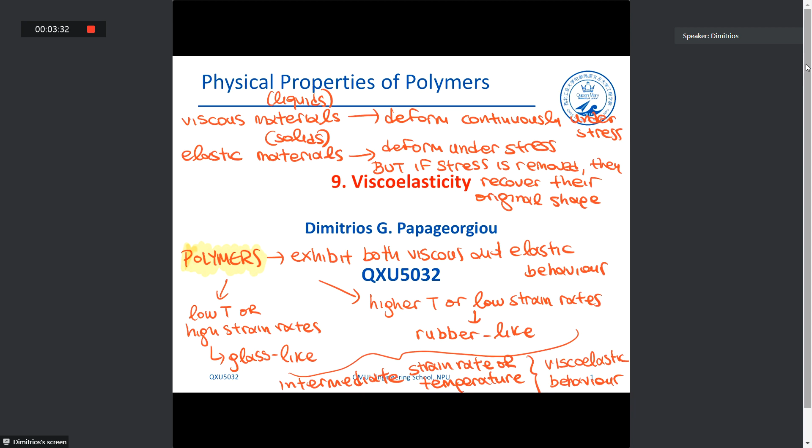Okay, so let's get started today. In order to finish with viscoelasticity, let's remind ourselves what we said about viscoelasticity, which is a property of the polymers, essentially, because they exhibit both elastic and viscous behavior, okay?

And we said that in terms of viscoelasticity, two phenomena that are very interesting and very practical in using polymers in engineering applications are creep and stress relaxation, okay?

So a distinctive feature of the mechanical behavior of polymers is the way they respond to an applied stress or an applied strain, okay? Creep behavior essentially defines how a polymer behaves under constant stress, while stress relaxation gives us an indication of how a polymer operates under constant strain, and what is the time dependence decrease of stress under constant strain, okay?

So we also looked at the two very common models used to study creep and relaxation: the Maxwell model and the Kelvin-Voigt model. We already said that the Maxwell model is most appropriate for studying relaxation behavior, while the Kelvin-Voigt model, or the Voigt model as it's most commonly named, is very suitable for studying the creep behavior of polymers.

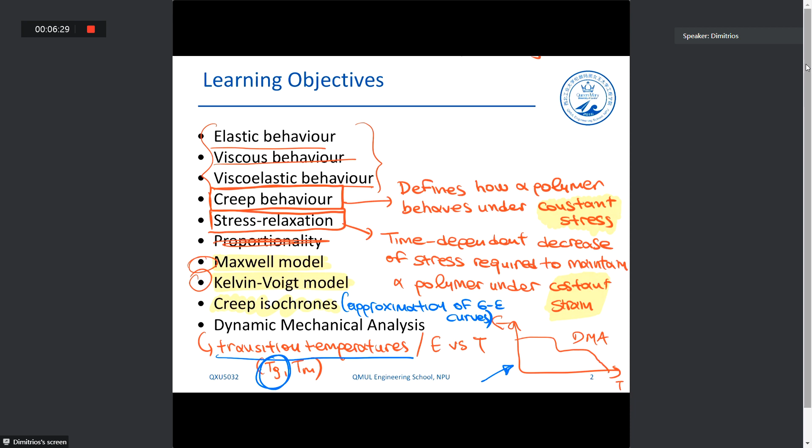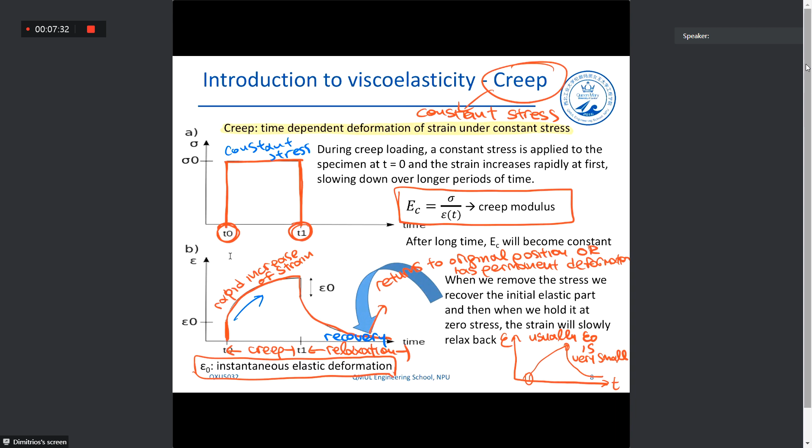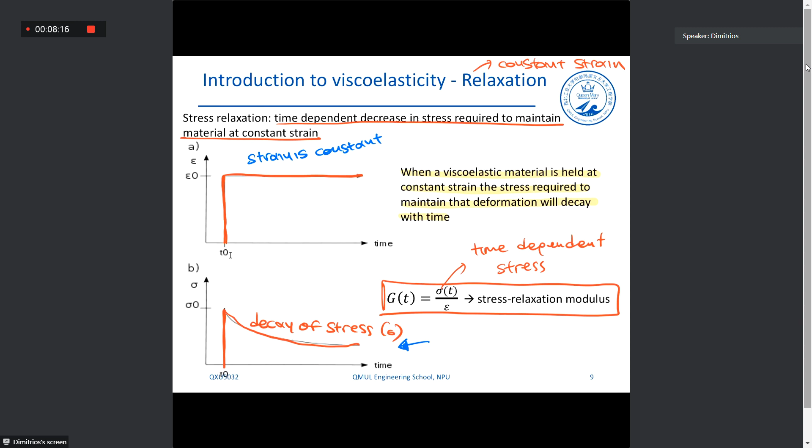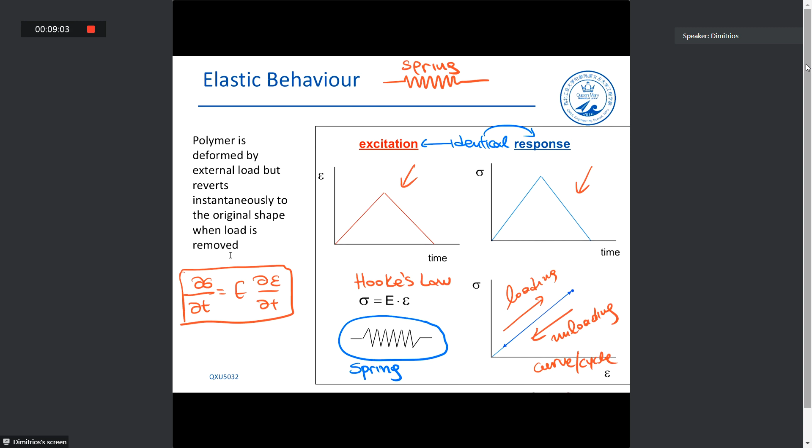You can see that in terms of the loading and unloading conditions, there is no energy that is lost in an elastic material. An elastic material is represented by this spring in these simple 1D viscoelastic models, which consist of combinations between springs and dashpots.

Dashpots are a way of representing viscous behavior, where essentially all energy that we're inputting into the material, all excitation, all energy is lost.

As a result, the polymer flows irreversibly under the action of external forces. In this case, the equation that describes viscous behavior is given by Newton's law, which is the viscosity times the strain rate.

Finally, we have the viscoelastic behavior, which is a combination of the two. As I told you, it's modeled with combinations between dashpots and springs, and the more complex we try to model this behavior, combinations of dashpots and springs, the more difficult the maths becomes.

As a result of the viscoelastic behavior, we have parts of the energy lost, not full energy loss. So energy is lost partly, let's say.

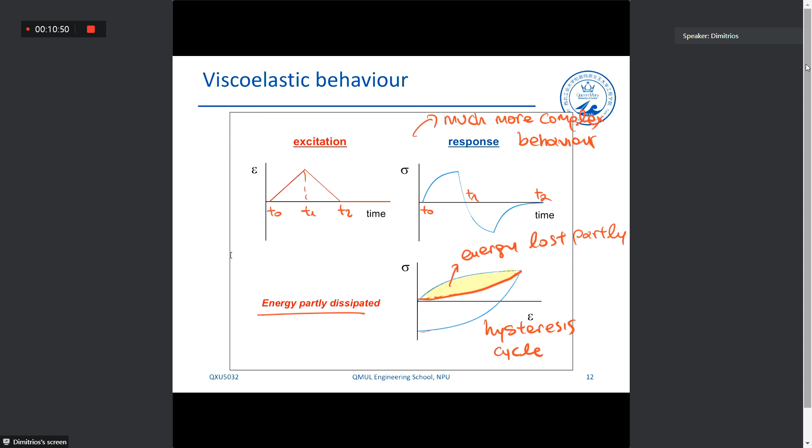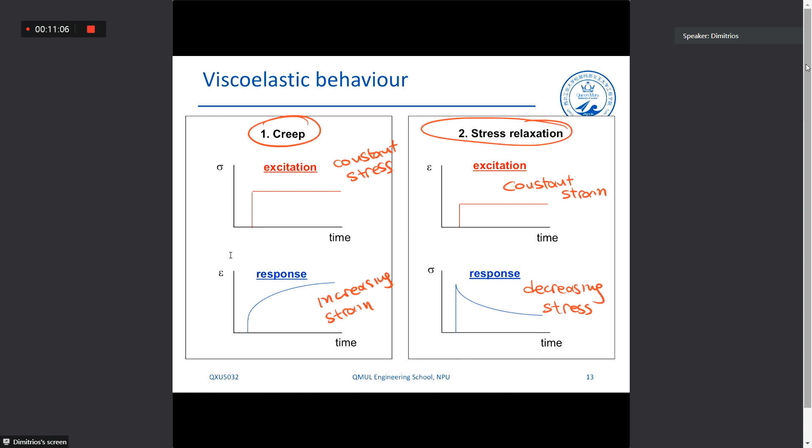We talked about the Maxwell and Voigt models, which are the simplest ones, essentially. In the Maxwell model, we have a spring and a dashpot in series. In the Voigt model, these are connected in parallel.

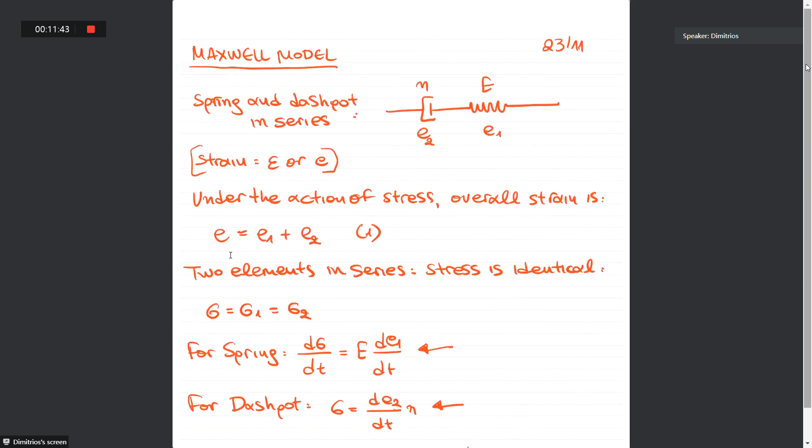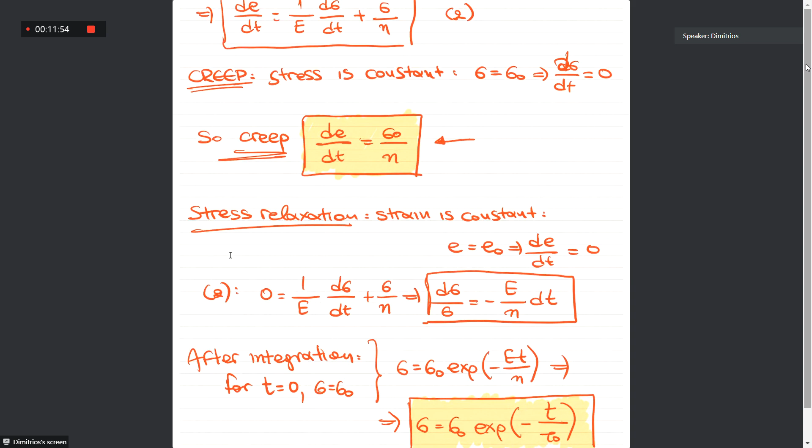And we went through our notes, and as we can see, for the Maxwell model, we obtain this equation for the creep behavior, which, as we understood, cannot describe the creep behavior, because the ultimate graph for creep behavior based on Maxwell's model is this one.

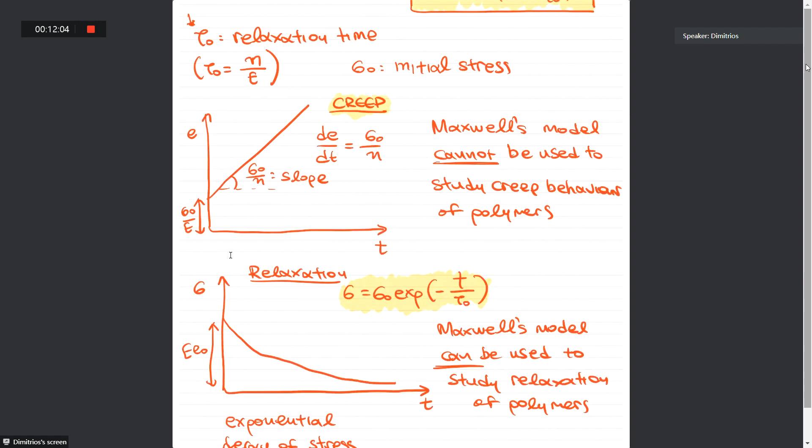So it cannot be used to study the creep behavior of polymers. While in terms of the stress relaxation, we can see that it is very useful to use the Maxwell model, because it can quite accurately be used to study the relaxation of polymers.

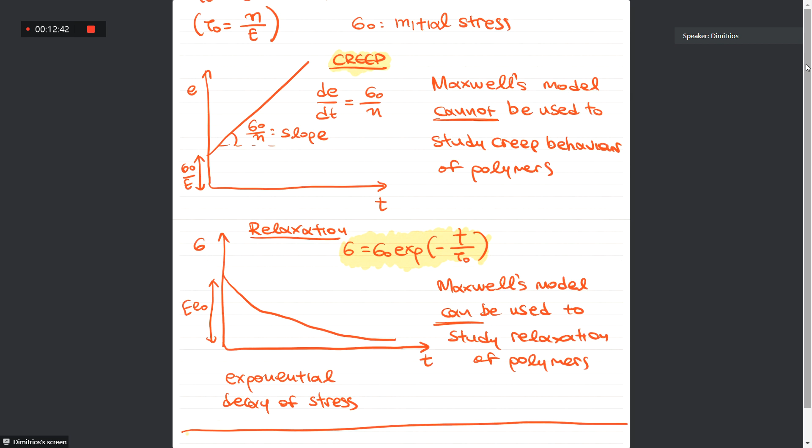Now, the Voigt model. The Voigt model is given, as I told you, by a spring and a dashpot connected in parallel, so that leads to a uniform strain.

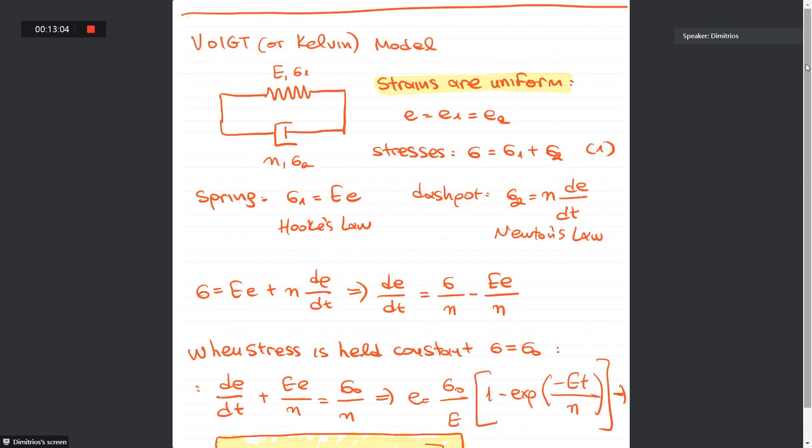As a result, after some very simple transformations of Hooke's and Newton's law, which I expect you to remember for the exams, we have this equation for the polymer undergoing creep.

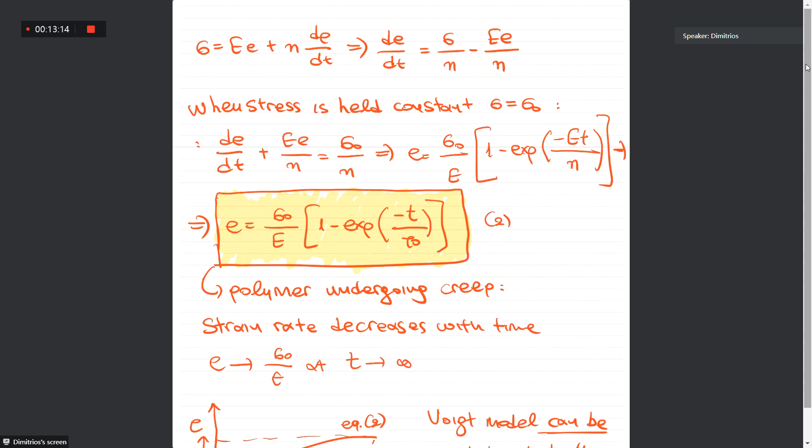In this case, I should clarify that τ0 is not the relaxation time. In this case, it is called the retardation time, even though it's given by the same equation.

Eta over E — this is the retardation time. It is the measure of the time of the material that needs to accumulate the creep strain.

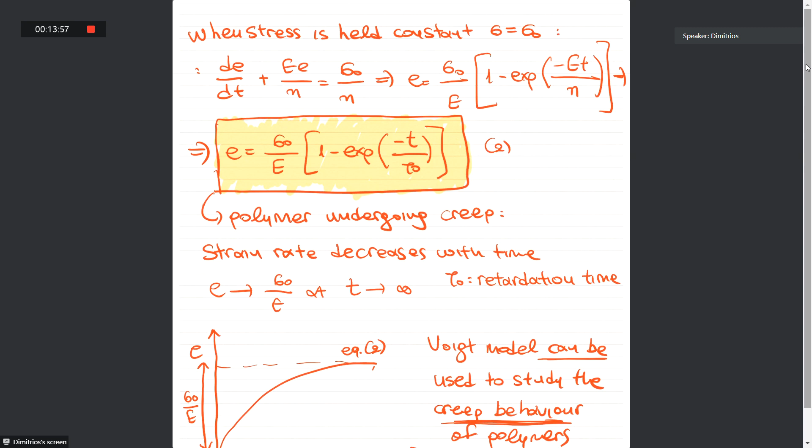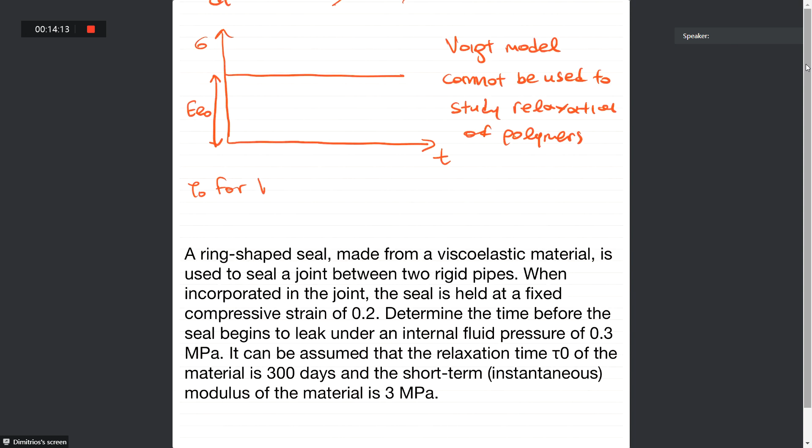This is a problem we will be discussing later. τ0 is the retardation time. Essentially, it is the measure of the time taken for the creep strain to accumulate. So how fast creep strain increases is determined by this time.

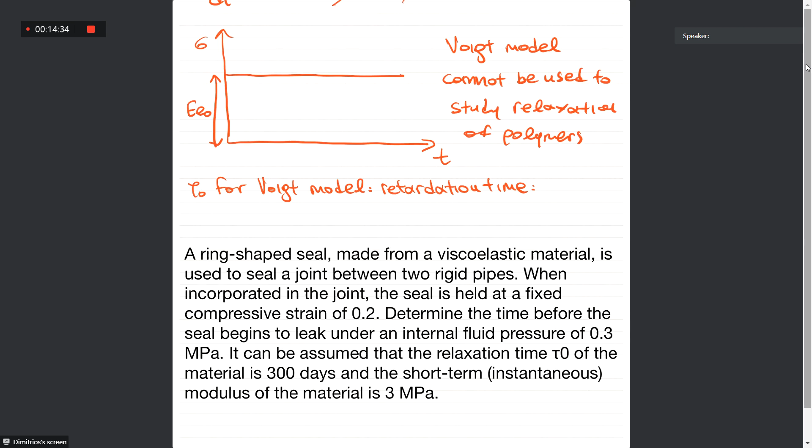Let me move this a bit. Can I move it like that? No? Anyway, I'll squeeze this here. So, retardation time — it is a measure of the time.

So essentially we said that for creep, we apply constant stress and we measure the strain. So essentially it gives us how fast we will reach this maximum strain here, the creep strain. So the shorter the retardation time, that leads to a rapid creep strain.

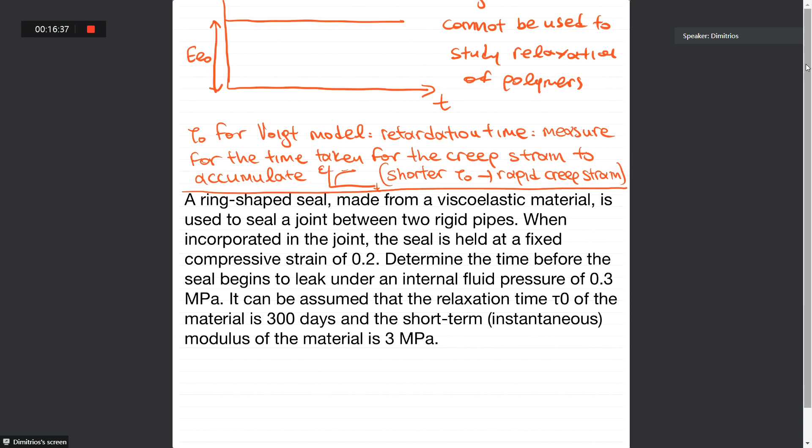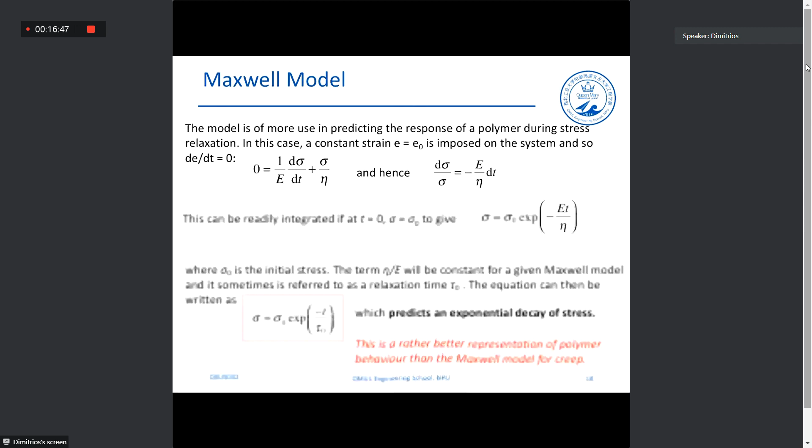Okay, let's go back to the slides. Besides the Maxwell and the Voigt model, which we discussed already, there are more complex models, as I told you. A model that can be used to account for both phenomena is the standard linear solid model, where we have a spring connected in series with a dashpot, and a spring in parallel.

Why can I not see you? Okay, anyway, so this is a 1D mechanical model, as we said.

And essentially we already saw that this model is useful for the decomposition of stress in glassy polymers.

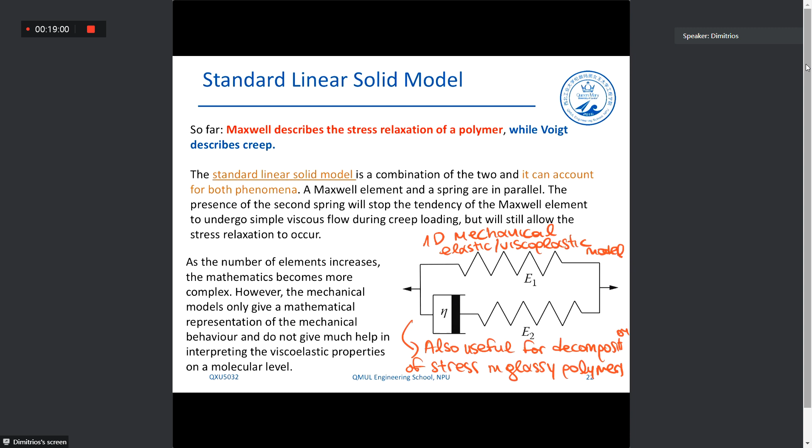We will not be going through the mathematics of the standard linear solid model, partly because they're not that interesting—it's just simple substitutions and so on. So we already have established two models that can relatively accurately describe creep and stress relaxation. In any case, if you need to use any of the creep or stress relaxation equations for any problems you might need to solve, you can use one of the Voigt or the Maxwell equations.

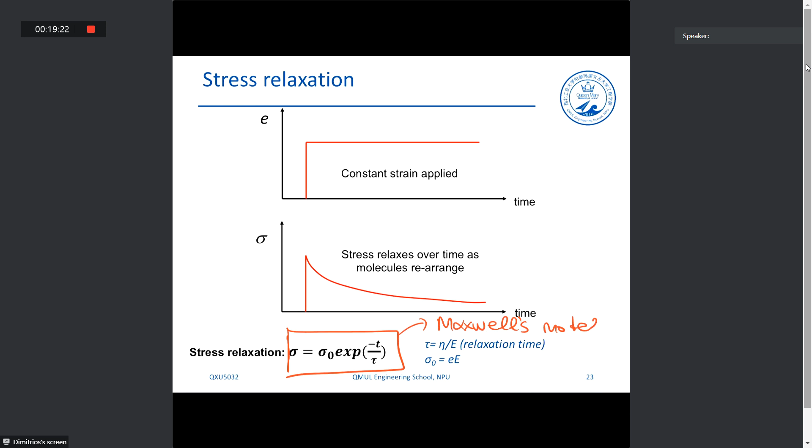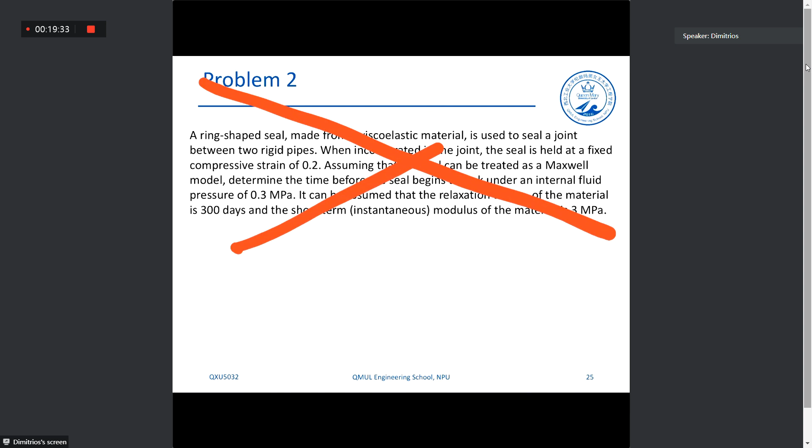Yep, this is what we said about stress relaxation. As we said, this equation originates from Maxwell's model. Forget about that one, and that one—I'm not sure if you have the new updated slides, I have the old ones, that's why I won't be going through these today.

Now let's have a look at what these creep isochrones are. Sometimes what we can do is perform creep tests in order to obtain the stress-strain curves for a material, and these modified stress-strain curves, as you can see here—this is a stress-strain curve.

Make this shorter. These are essentially called creep isochrones, okay? So the construction of creep isochrones is essentially another method for fabricating or obtaining a stress-strain curve for a material.

This is too thick. Of course, they cannot at any point substitute the actual stress-strain curves, okay? So let's not confuse ourselves with their efficiency, but still they are an approximation, okay?

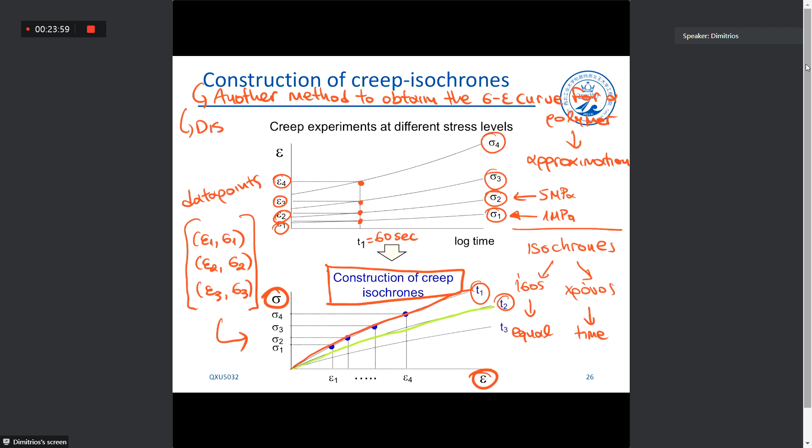The disadvantage of constructing a creep isochrone, as you can realize, is that it takes too long. So that's a disadvantage, and of course it's an approximation—it can never be used to fully substitute the stress-strain curve.

It's time consuming. I repeat, what we do is we perform creep experiments at constant stress and measure strain over time. At a constant time, we get data points of strain over stress, given that we know both, and we construct these creep isochrones.

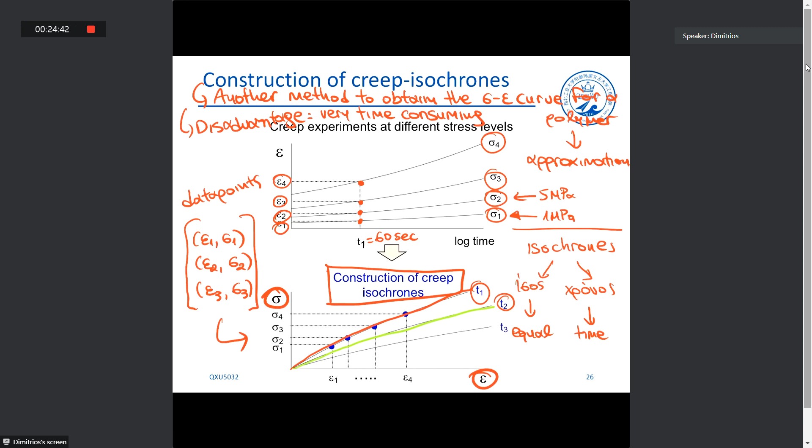In the same way, we can fabricate the relaxation isochrones. In this case, we keep the strain constant and fabricate relaxation curves for different strains. For constant times, we obtain data points such as epsilon 1, sigma 1, and so on, and we fabricate what is called relaxation isochrones, which have very similar characteristics to creep isochrones.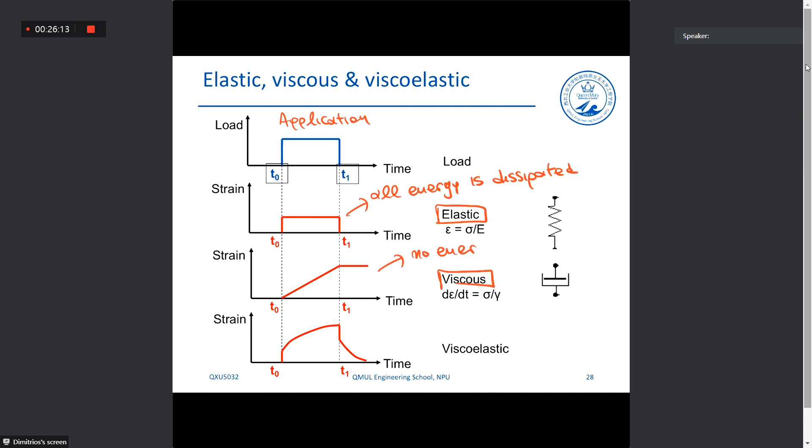In terms of the viscous response, we don't have any viscous response here - we have no energy dissipation. Here we have Hooke's law, and here we have Newton's law.

For the viscoelastic material, we have partly energy dissipation, and we have permanent deformation in the viscous response.

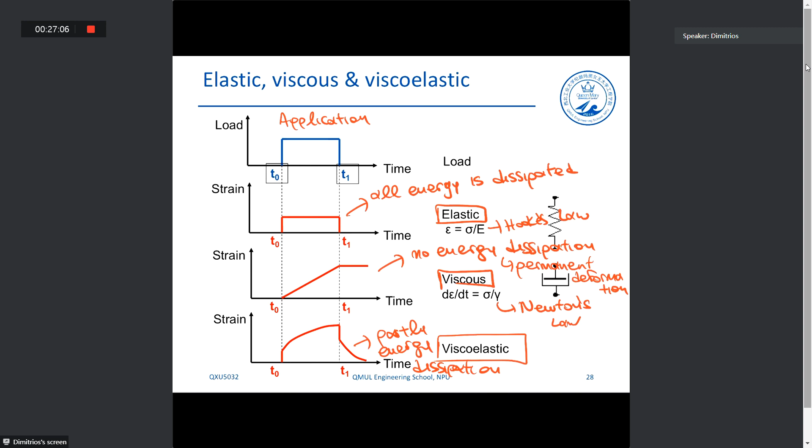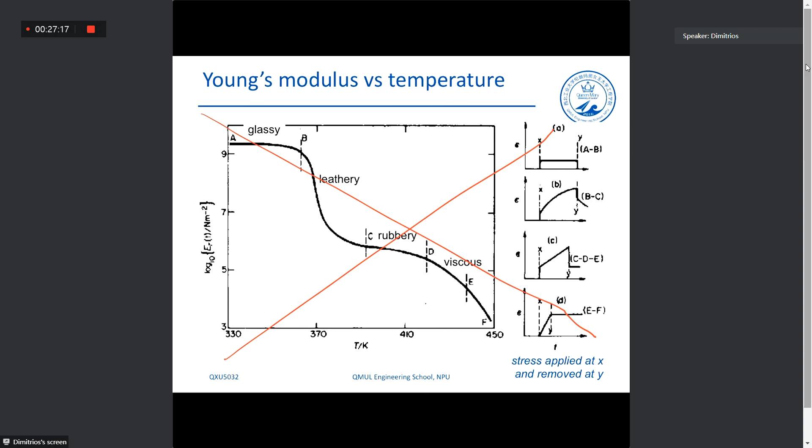Anyway, we have already discussed this, and this is just a slide to remind you of the different behaviors of polymers. This is actually a wrong slide, which is why I wanted to update it - the response shown here is wrong, but it's fine for now.

Now let's go to dynamic mechanical analysis, which is one of the most important thermal analysis techniques. We have already spoken about different thermal analysis techniques - these are experimental or characterization techniques that tell us how a polymer behaves under the influence of temperature.

What is the structure, or generally the characteristics, of a polymer if a certain amount of heat is applied to it. Thermal analysis techniques are mainly the three we discussed: DSC, which we use to measure melting point, crystallization point, and glass transition; TGA, which is used to measure the decomposition of polymers; and DMA.

Or DMTA, Dynamic Mechanical Thermal Analysis. DMA is much more sensitive than DSC in identifying the glass transition and secondary transitions. So in terms of Tg, DMA is more sensitive, and DMA can also identify secondary transitions such as the secondary glass transition as well. It can identify...

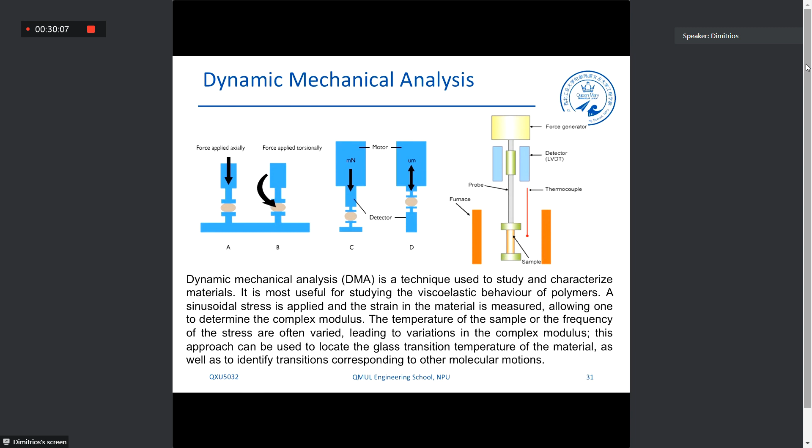What we usually do is vary the frequency of the measurement. Let me show you more clearly here - we usually vary either the temperature or the frequency of the measurement in order to obtain a graph of modulus versus temperature, for different types of material.

There are different types of holders that we use, where this purple thing is the sample. What we do here in, let's say, a dual cantilever setup is essentially move this cantilever up and down. The frequency that we move this cantilever at is provided by us - it's usually a constant frequency.

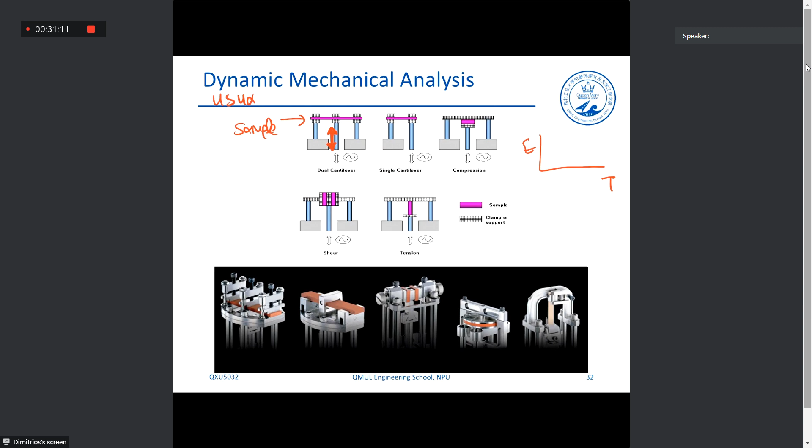And then we do a temperature sweep. As you can see, these are different sample holders. The sample holder we usually use depends on the amount of material we have, and also on the thickness of the material.

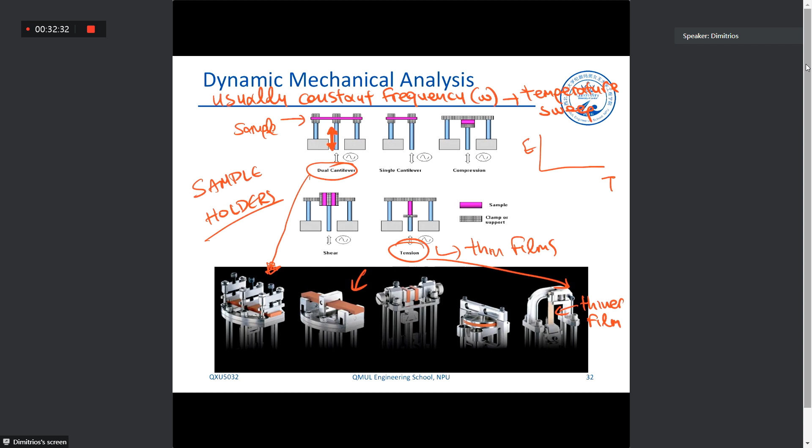When we have thin films, it's better to use this kind of sample holder, like this one. You can see here that this one is for a thinner film compared to the sample here. This is a dual cantilever, essentially that one. This one is for compression. This is a dual. And this is for shear.

The possibilities to use different kinds of samples and different types of holders are quite wide for dynamic mechanical analysis, and that gives us a lot of flexibility, even though the information we obtain generally isn't too different using different sample holders or measurement techniques.

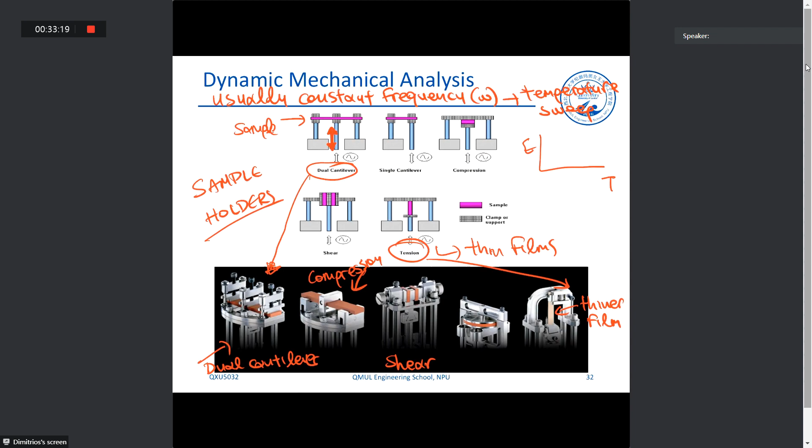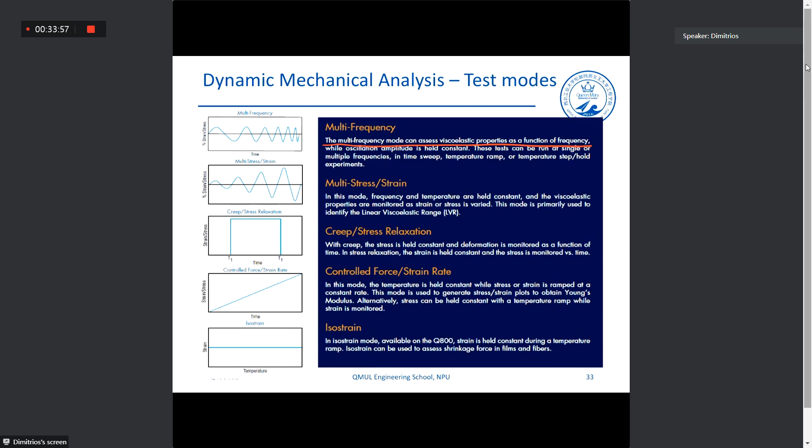So in terms of its standard use, the basic operation of DMA is that we apply sinusoidal varying stress and measure the deformation. The stress is usually applied at a constant frequency, but we can also do a multi-frequency test, where we assess the properties as a function of frequency while the oscillation amplitude is held constant. Anyway, these are not too important for you.

The two main test modes are temperature sweep and frequency sweep test. Temperature sweep is the most common. It's a measurement method where essentially we keep the frequency constant and we ramp the temperature. Usually we use much smaller heating rates than DSC, from 1 to 5 Celsius degrees per minute, in order to have enough time to obtain a good resolution of the test.

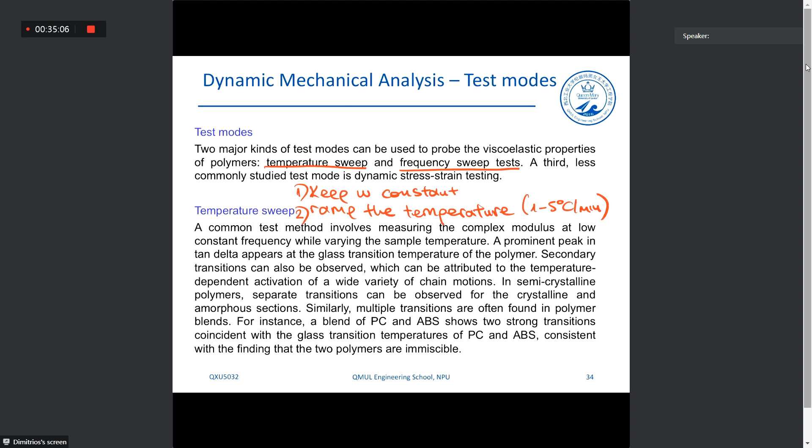And the second mode is a frequency sweep, where essentially what we do is keep the temperature constant, and instead we vary omega.

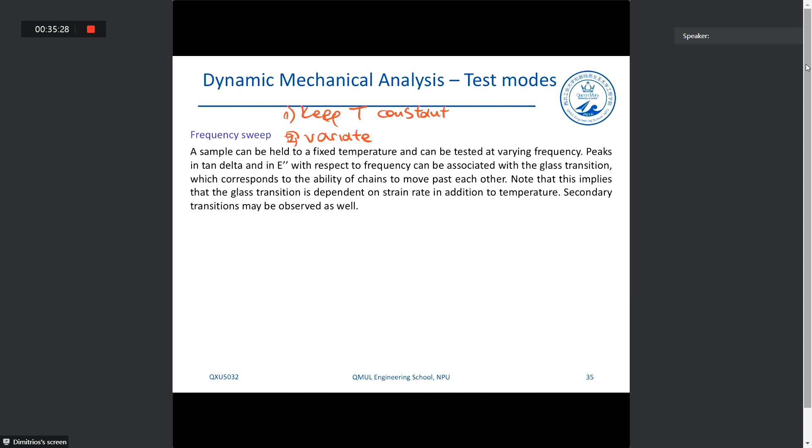Now I use this slide to show you that some people use DMA to measure the glass transition, but sometimes they use different parameters of the DMA measurement, which are wrong, in order to obtain the glass transition.

What we have said already is that the glass transition is given by the peak of the tan delta over temperature, or approximately the middle of this significant downshift, when the material softens completely. Some people also claim that the Tg can be obtained by the onset of this significant downshift, which is wrong.

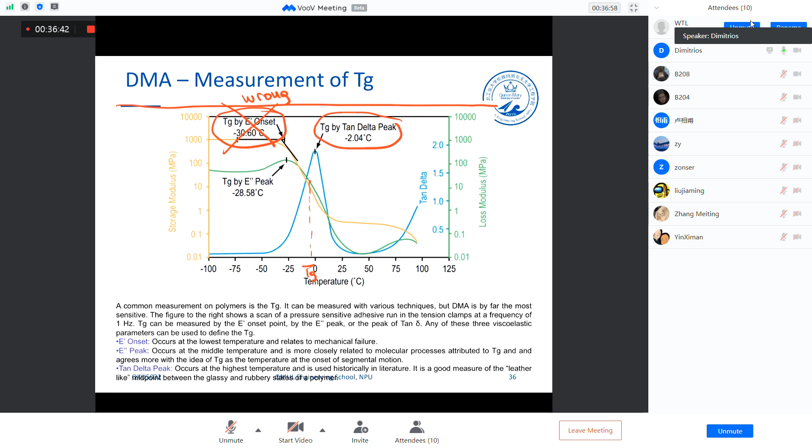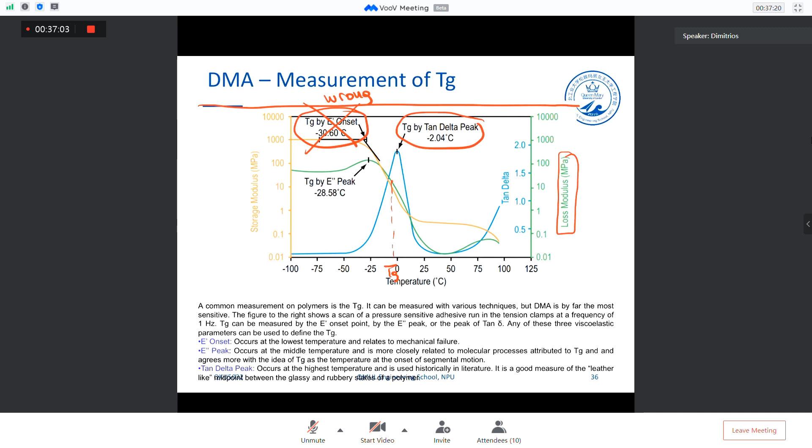Also, some people are saying that the information we can get from DMA is not only the storage modulus and the tan delta, but something else called the Loss Modulus. The Loss Modulus is essentially the ratio of the viscous component to stress, and is related to the ability of a material to dissipate stress through heat. But those people are claiming that we can obtain the Tg by the peak of the Loss Modulus, which is again wrong.

You can see how big the difference is between the peak of the tan delta, or the middle of the storage modulus versus temperature graph where it shows a big downshift, a big slope. In this case, we have a -2 Celsius degree glass transition, while the other two methods give us a glass transition of -30, which is wrong. So anytime someone asks you to identify the glass transition from a storage modulus or tan delta or a DMA measurement in general, you use these two parameters that we discussed.

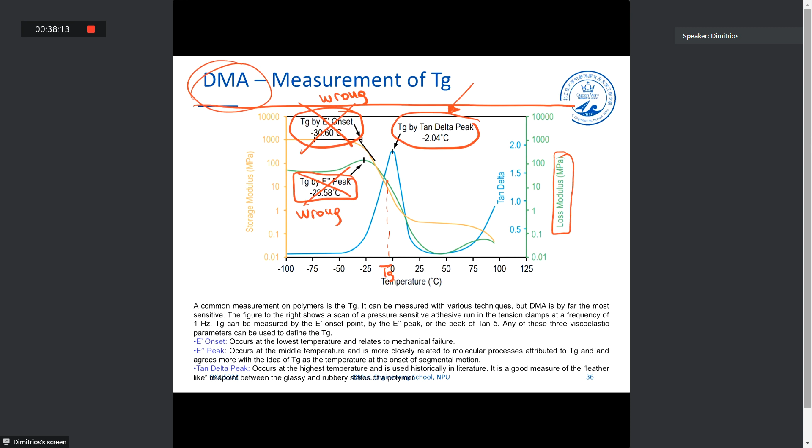Either the middle of this downshift, this yellow line, or the peak of the tan delta.

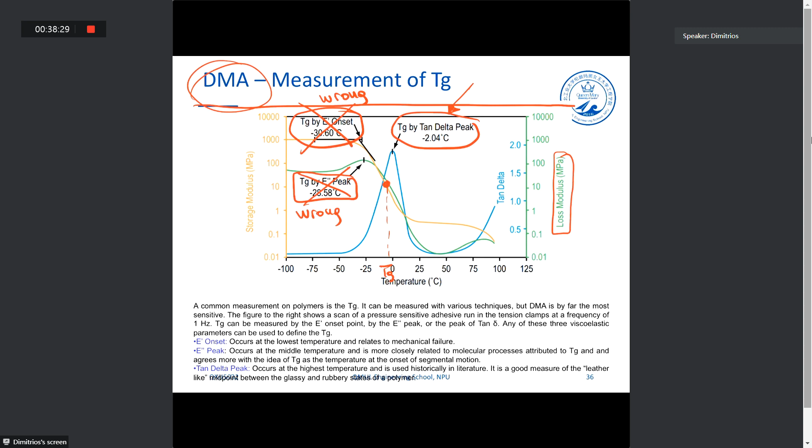Usually the reason for the shift of the Tg to higher temperatures when using nanofillers is because of confinement of the chains from the nanofillers. So what these nanofillers do is essentially confine the chains, not allowing them to move as freely, and as a result they need more energy in order to obtain higher mobility, to allow these conformational changes and pass through the glass transition temperature.

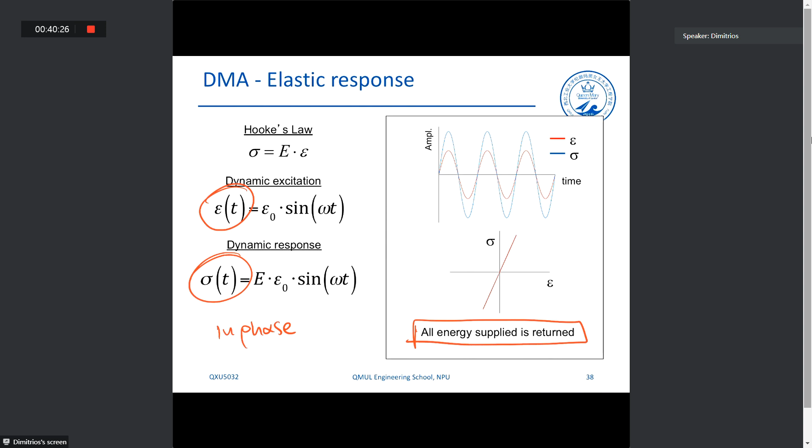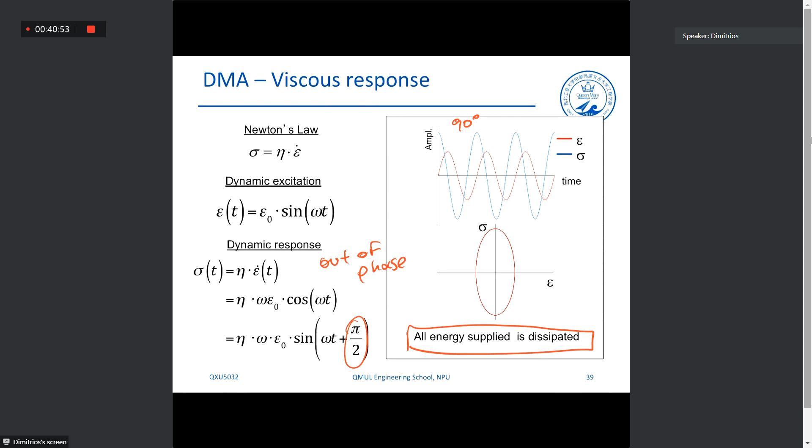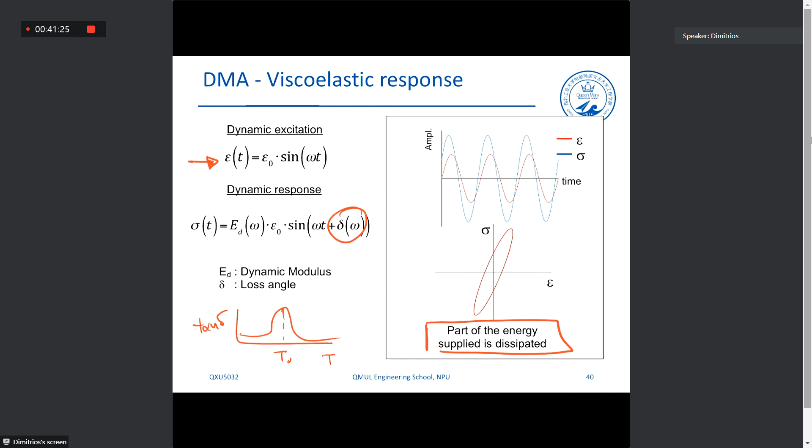And finally, for the viscoelastic material, we have a part of the energy that is applied that is dissipated. We again provide an excitation, and the response is given as a function of the loss angle. This loss angle is essentially providing the tan delta versus temperature graph, which gives us the glass transition. So for an elastic response, the angle between stress and strain is 0. For a Newtonian liquid, for a viscous response, essentially we have the two of them being out of phase.

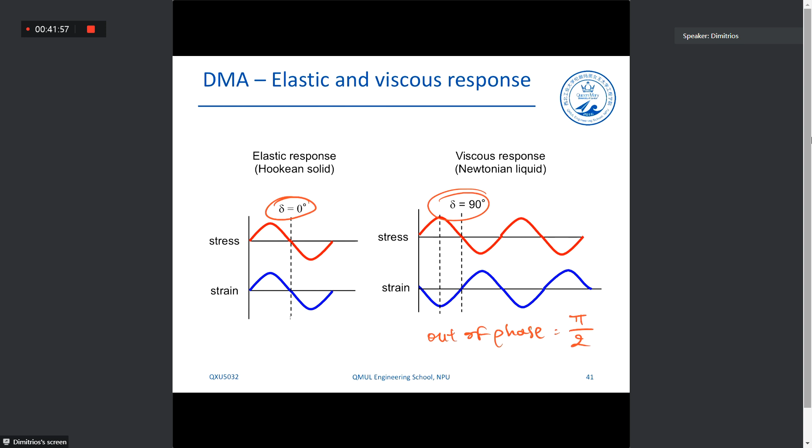The shift between the stress and the strain is equal to pi over 2. And finally, in the viscoelastic response, the phase angle ranges between 0 and 90 degrees. The information that we get from the DMA is the storage modulus.

Wherever you see G substituted with E... I don't know why I used G in this case. Some people use the G letter to show the results from DMA, but usually the most common one is E. Okay, the storage modulus, which is the same as elastic modulus.

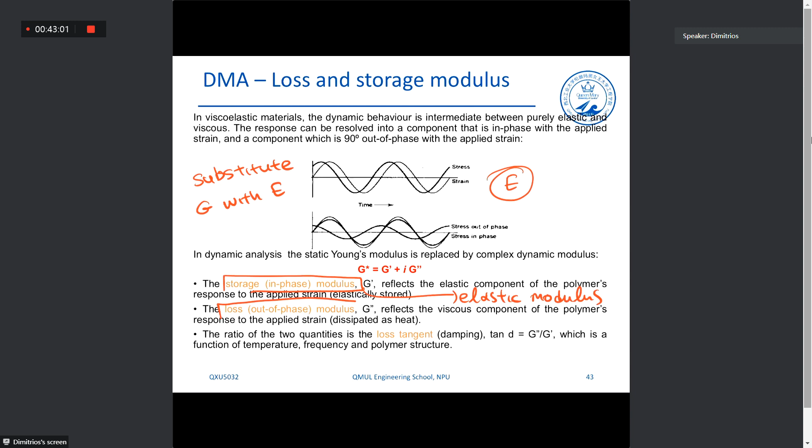The loss modulus, as I told you, is the ratio of the viscous component to the stress, and essentially is related to the material's ability to dissipate stress through heat. And finally, the ratio of E double prime over E prime equals tan delta. Okay, and that is pretty much it.

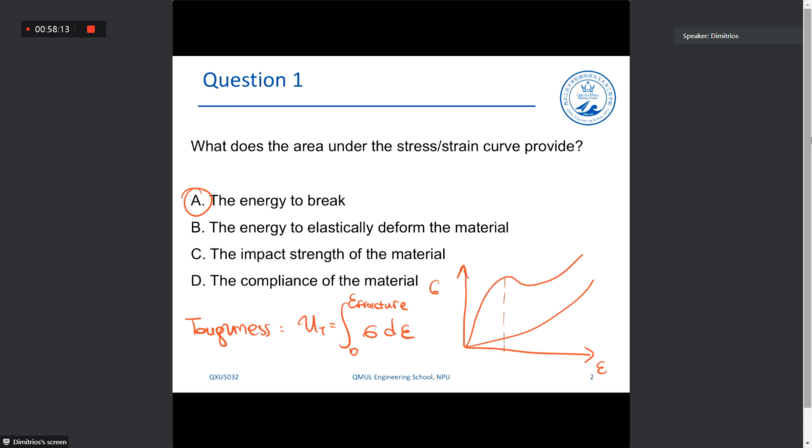And we said that toughness is given by the integral, starting from 0 to the strain of fracture, of sigma d epsilon. A lot of you said B, but B says elastically deform the material. Elastic deformation takes place only in this initial part, which has to do with resilience, as we said.

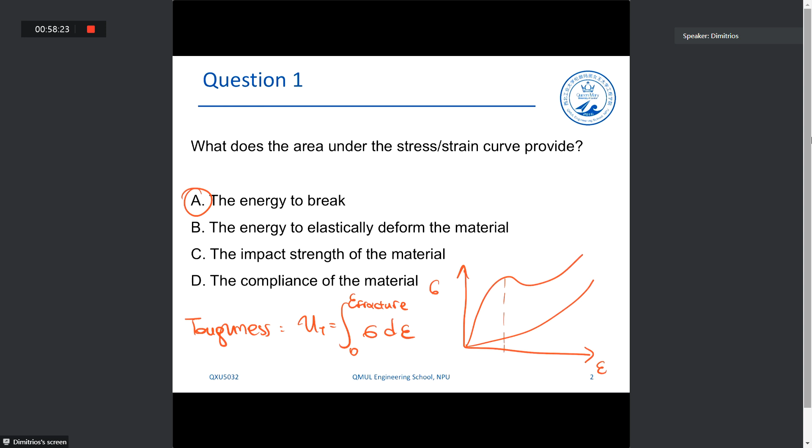Okay, that is question number 1. Now, question number 2: what are the units of resilience? Resilience, we said, is the area under the elastic part of the stress strain curve. Question number 2, options A, B, C, and D.

Question 2, A, B, C, and D. 30 more seconds. Okay, let me end this one and vote. So for the polymer group, I have 62% for C, 32% for A, and then a couple of answers for B and D.

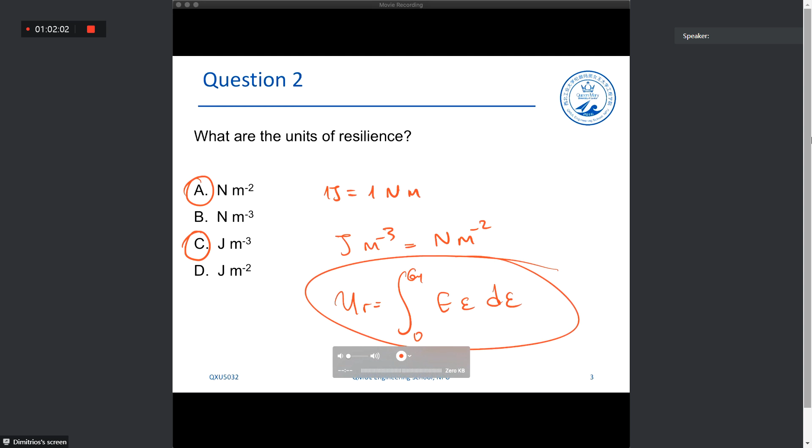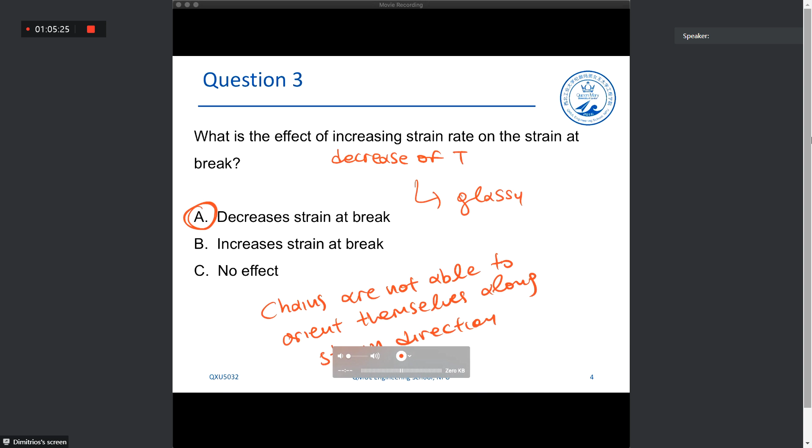I repeat that in the exam, in the multiple choice questions, there will be only one correct answer, okay? In all the exam questions, make sure that you read very carefully the definition of the question. There might be tricks being played, not just by myself but by other teachers as well, to confuse you a bit. So understand completely what it says in the definition of the problem or the question.

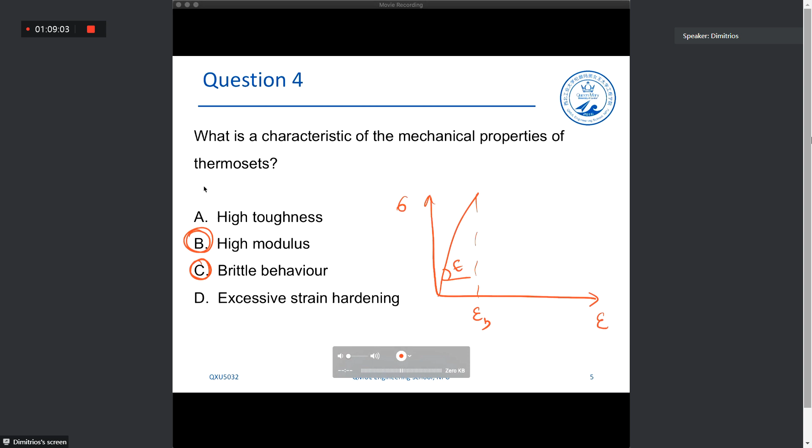Let me check the materials group. I think they did it slightly better, 60 and 55% said B and C, which are indeed the correct answers for a thermoset. The stress strain curve usually looks like that, okay? Because of the presence of crosslinks and very strong bonds between the chains, the three-dimensional network between the chains, it does not allow the polymer to elongate a lot. So the polymer has generally high modulus and a low strain at break. And because it has low strain at break, it has brittle behavior and a high modulus, as we said.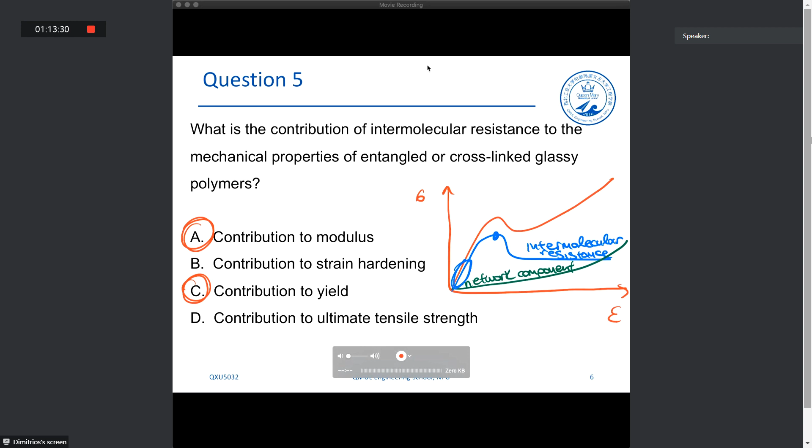Question number 6: What is a process that includes extreme localization of strain? Question 6: A, B, C, and D. 30 more seconds. Okay, I end this. Indeed, the majority said C, which is the correct answer.

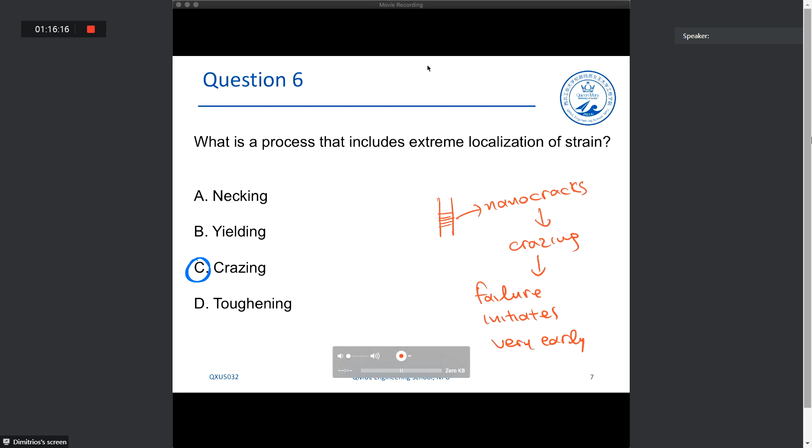Question number 7: What is the effect of short chains on the ultimate tensile strength? Question 7: A, B, and C. One minute for that. It's very simple.

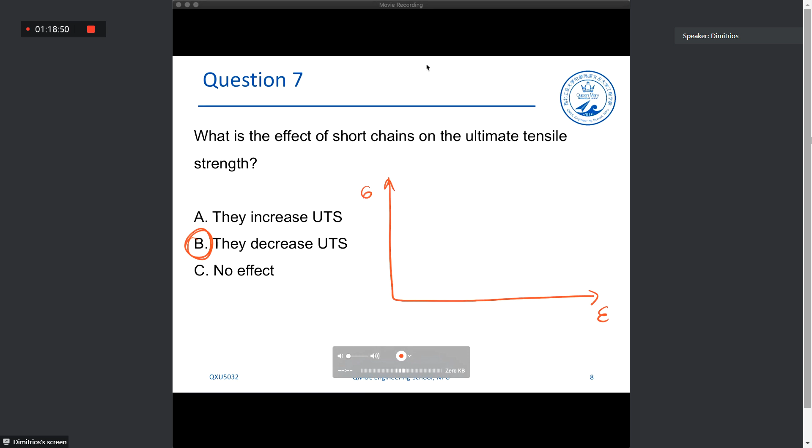Short chains make the polymer decrease its ultimate tensile strength, because, as we saw, the stress strain curve can look like that. And for short chains, because they can disentangle much easier, they show a decreased ultimate tensile strength, due to lower entanglement density. Okay.

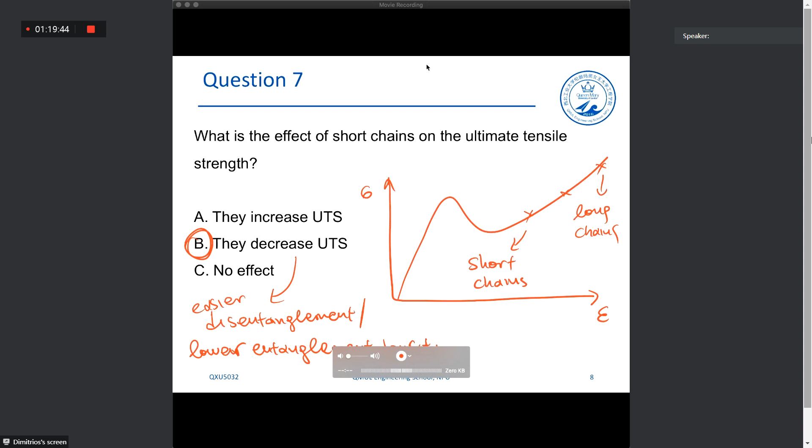What do you mean? You cannot see question number 10? Ah, sorry, I didn't notice I had that there. Okay, sorry.

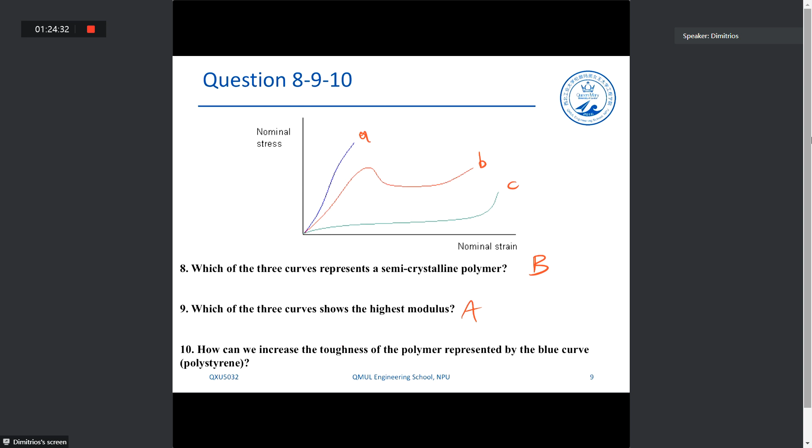Indeed, rubber particles or plasticizers, or in general, blending with softer polymers, is a very efficient strategy. So an answer can be incorporation of adhering rubber particles. And what do those rubber particles do? They initiate many deformation zones, and secondly, they stabilize cracks or dissipate crack growth.

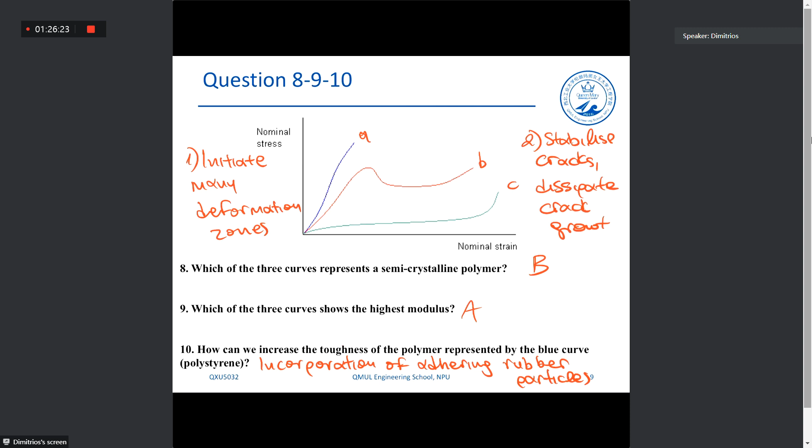Indeed, the increase of temperature, I saw a couple of you mention the increase of temperature or decrease of strain rate. It can be a way to achieve that, but overall it will not achieve as high toughness as the incorporation of rubber nanoparticles, because the chains are still highly entangled. The entanglements will cause significant problems even if we supply a certain amount of thermal energy to the chain. But yes, increase of temperature can be considered a correct answer.

And a very quick problem on viscoelasticity, and that's it for today. We have a ring-shaped seal made from a viscoelastic material, used to seal a joint between two rigid pipes. When incorporated in the joint, the seal is held at a fixed compressive strain of 0.2. Determine the time before the seal begins to leak under an internal fluid pressure of 0.3 megapascals. Assume the relaxation time tau 0 of the material is 300 days, and the short-term instantaneous modulus is 3 megapascals. So what we want is the time before the seal begins to leak. I'll give you 5 minutes, and then I will provide the answer.

Anyone who solves this, I'll provide the answer in the chat, okay?

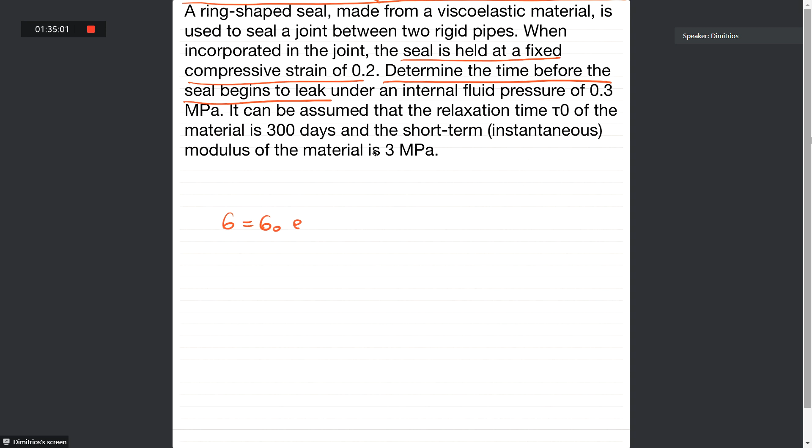We're talking about relaxation, because the seal is held at a fixed strain. So we're talking about relaxation. The equation that gives us the most appropriate model for relaxation is the Maxwell model, which is sigma equals sigma 0 times exponent of minus t over tau 0. Sigma 0 is equal to strain times short-term modulus.

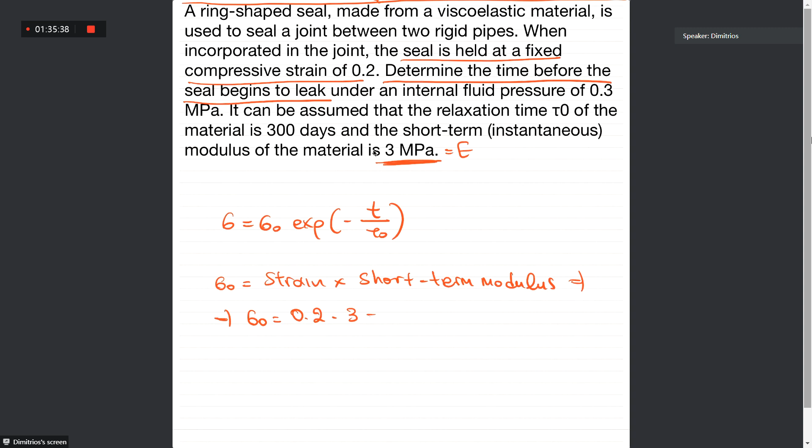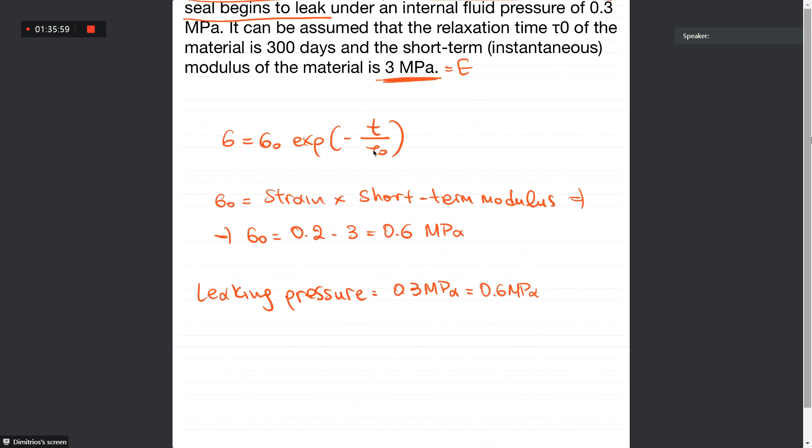So sigma 0 equals 0.2 times 3 megapascals. This is the modulus, not sigma 0 as some of you put. So 0.2 times 3 megapascals equals 0.6 megapascals. So the leaking pressure equals 0.3 megapascals equals 0.6 megapascals times exponent minus t over tau 0, and we know tau 0 is 300 days.

300. So if you solve for that, therefore T equals 208 days. So the seal will begin leaking at 208 days. It's very simple—just a substitution of the correct values into the Maxwell model for stress relaxation.